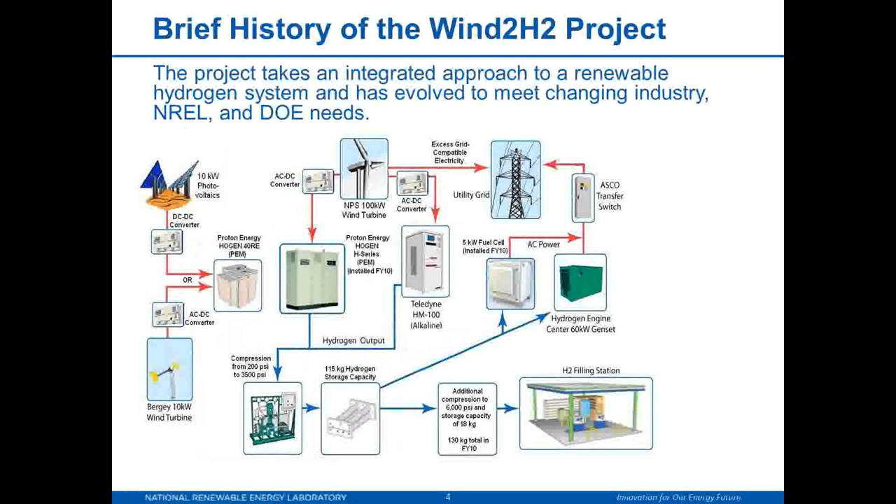So the physical part of the project looks like this. You can see we have the ability to tie in a variety of resources into hydrogen generation and production, both photovoltaics that we have on site and several dedicated wind turbines that we have on site. We can direct couple or through DC conversion couple those to a variety of electrolyzers. We can then compress and store the hydrogen. And you can see how the station here has evolved over the years. We've got different electrolyzers, different compression technologies.

We can then take the hydrogen that we produce, store it, and then use it to fuel vehicles or put it back on the grid using either a genset or a 5-kilowatt fuel cell. And one of the things we're working on seriously right now is improving compressor reliability, because we found through our data gathering activities through other DOE projects that hydrogen compressors are really a reliability concern when it comes to the hydrogen fueling stations.

So the question you might ask is, why would we do this analysis? And just again, in this analysis we looked at an hour-by-hour cost modeling of centralized wind-based electrolysis. So as Eric mentioned, cost is a problem. Wind electrolysis production cost estimates were limited geographically before we did this analysis, and we really expanded it to cover more of the country. System efficiency remains a barrier as well, and that primarily goes into the efficiencies of the electrolyzers.

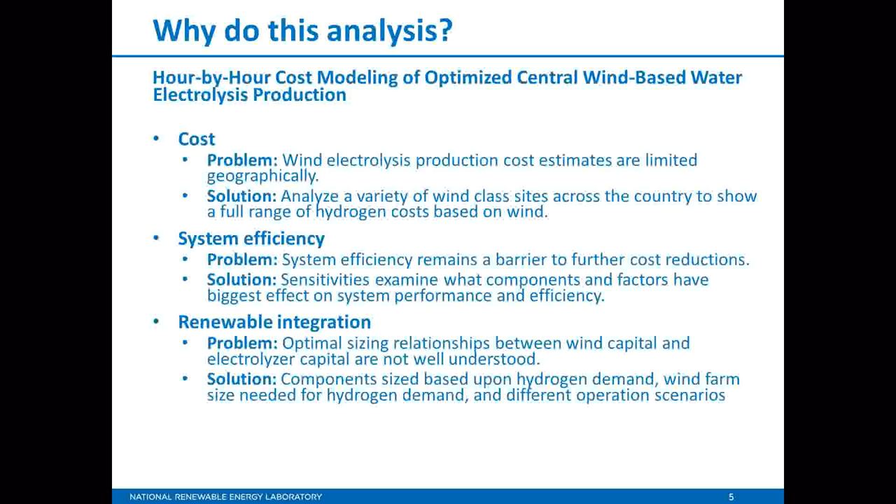So we did a sensitivity analysis to look at what components and what factors have the most impact on the cost of hydrogen produced in this method. And we also wanted to look at the relationships between the size of the wind and the size of the electrolyzer capital that you would be deploying in a case like this.

So we wanted to expand the previous analysis that we had done a few years ago, which just focused on California and the California electricity market, to look across the nation, look at the consequences of different configurations and different operation scenarios, understand the sizing implications between the electrolyzers and the wind farms throughout different parts of the country, and identify further analysis and cost reduction areas.

So at a glance, this analysis looked at 42 different sites in 11 different states spanning 5 electricity markets. And for those of you who know anything about the electricity grid in the United States, we often talk about it as this sort of monolithic thing, but it's not. It's a patchwork of different regional electrical grids and markets operating in each one of those.

So we looked at wind classes that range from class 3 to class 6. If you get below class 3, it definitely doesn't make any economic sense, so we didn't look at those. And the higher class wind sites are pretty rare and located in special geographic locations, so we didn't really look at those either.

We looked at size ranges from 1,000 to 50,000 kilograms per day. An independent panel analysis in 2009 among electrolyzer producers found that in that range, the costs of scaling up are fairly linear. You don't get huge economies of scale in that range. And we also updated the analysis to harmonize with current DOE targets, which use 2007 as a reference year.

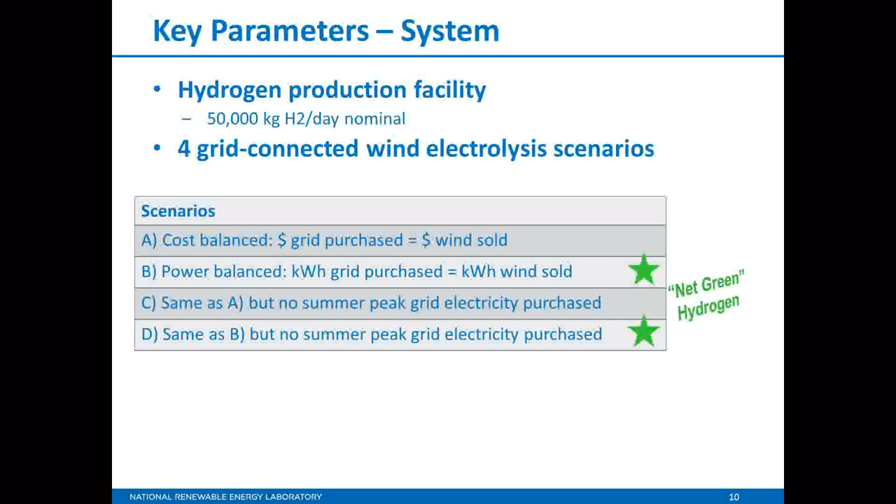Some of the parameters of our analysis. So we looked at a nominal design capacity of 50,000 kilograms a day with a 98% capacity factor on the electrolyzers, not on the wind. 106 megawatt hour electricity requirements at 50 kilowatt hours per kilogram, which is a fairly decent number for large scale, primarily alkaline electrolyzers of the size we're talking about.

53.2 million total depreciable capital costs. We included replacement and O&M costs, and we also included in the analysis of the life of the plant a 10% internal rate of return. So somebody doing this would actually be making some money at it, which is, of course, key to having success in any kind of new energy technology.

The wind farms, we looked at multiples of 3 megawatt turbines, which are generally the largest size that can be based on land these days. The general design performance was based on a Class 4 wind site, although, as I mentioned before, we did scale up from Class 3 to 6 wind sites.

We updated, based on a report from Wiser and Bolinger, some colleagues also here at NREL working in the wind program, the costs for the wind turbine capital and the O&M costs, the operation and maintenance costs. And you can see the wind capital costs went down slightly to $2,067 a kilowatt, whereas the O&M costs went up slightly. So we accounted for that.

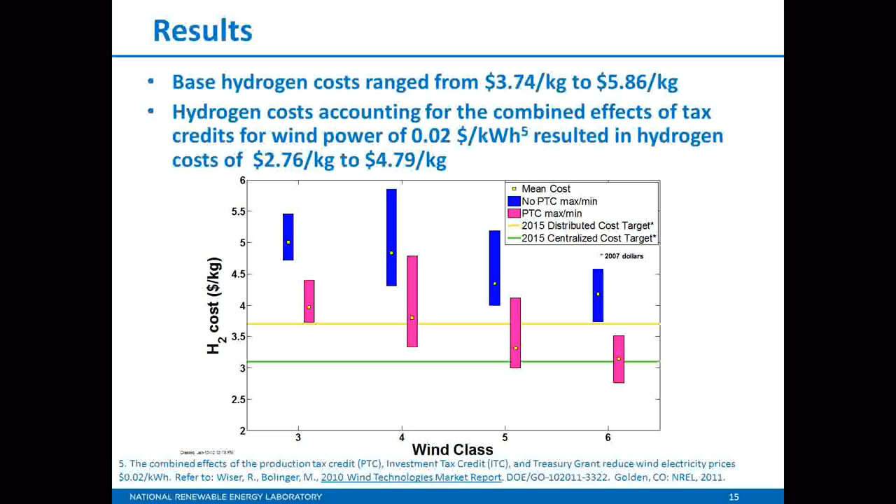Going on to the sensitivity analysis, we did look at the base case, which included wind turbine capital costs of $2,000 per kilowatt, electrolyzer energy use of 50 kilowatt hours per kilogram, capital cost at $408 per kilowatt, wind farm availability at 88%, and electrolyzer capacity factor at 98%. Again, we want to run the electrolyzers at their full power as much as we can to get the best capital utilization out of them.

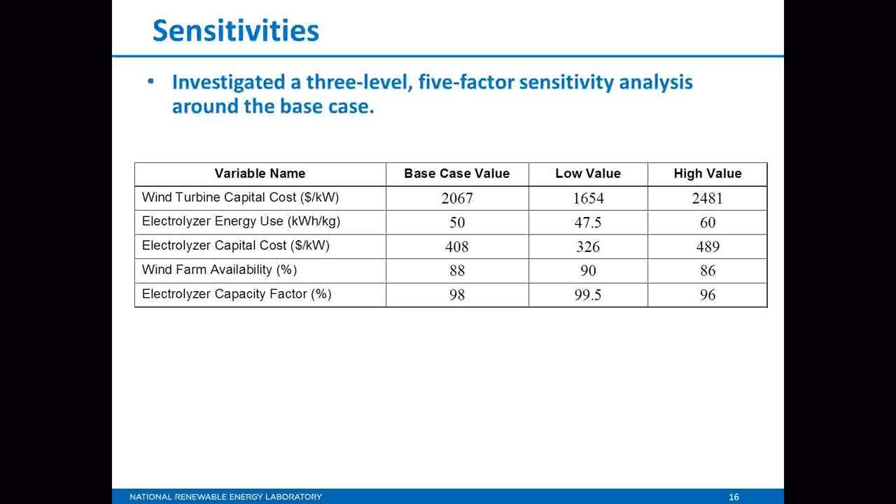So the more efficient we can make the electrolyzers, the lower cost hydrogen you're going to be able to produce. Because the primary feedstock you feed into an electrolyzer, for those of you who aren't familiar with the process, is electricity and water, and electricity being the most expensive of those feedstocks. So to the extent we can decrease that cost, you can produce lower cost hydrogen. Electrolyzer availability and wind availability, we didn't vary those sensitivities very much, but they didn't have very much of an impact either.

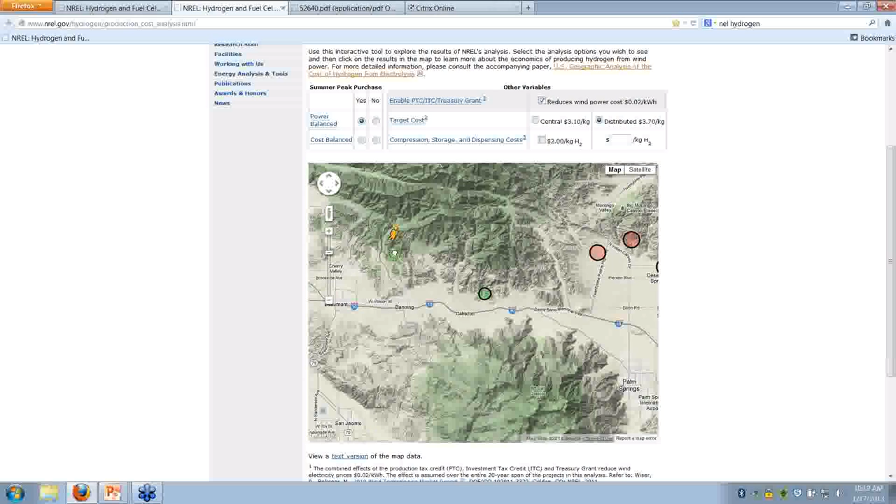But this really gives you more control and a better view into what the results are and how you can use them. And in fact, we found some surprising things, and you can zoom in. All of the goodness that comes along with Google's map program is available to you. So you can zoom in, of course, and you can turn on the terrain view, and you can turn on street view, and you can see exactly what the wind site that we're looking at looks like. So in this particular case, it's pretty empty, maybe a good place for a wind farm.

So let me go back to PowerPoint here, and so generally the way this website is set up, you can see red circles are sites that don't meet the DOE targets, depending on the assumptions that you've placed on the analysis here up at the top in the control panel. Green means it does meet the target. And furthermore, the size of the circle scales with the cost of hydrogen. So the smaller circles equals lower cost hydrogen, which is great, right?

So some of the controls you have available, as I mentioned, there were 4 scenarios that we used. There was power balanced, cost balanced, and there was the question of whether you purchase peak summer electricity or not, yes or no. So you can pick any one of the 4 analyses here, and it will update for you. You can also change the DOE cost target that you're looking at, either the central target or the distributed target, and that will change the color coding on the circles accordingly.

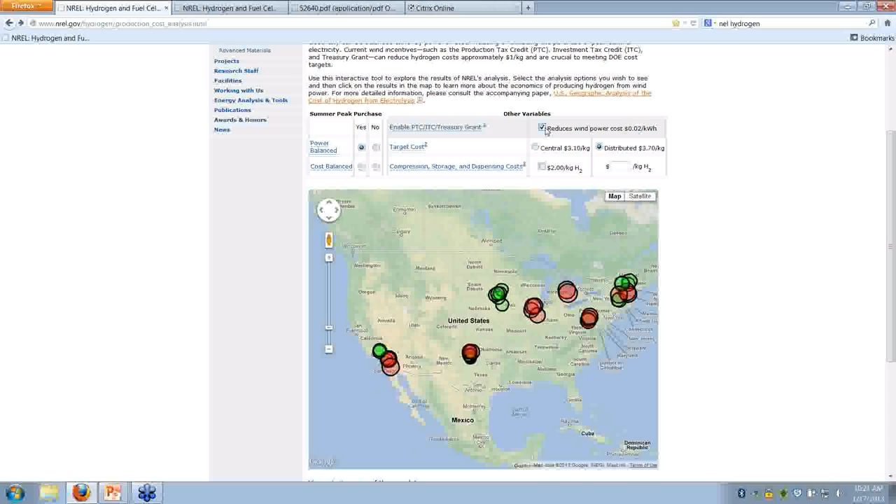You can also turn on and off the PTC, ITC Treasury grants. And as you can see on the map, we can even go do that right now. We have the PTC turned on right now, and we're comparing to the distributed target. If you turn the PTC off, all of your green circles go away. So again, that shows the importance of having those incentives in place for a production like this.

So the other thing, as I mentioned in the scope for this analysis, we didn't include compression, dispensing, and storage costs because we really wanted to look at hydrogen production and focus on that. And CSD, these costs are typically things that people talk about when they talk about using hydrogen as a vehicle fuel, which right now is a very, very small market for hydrogen use in the country. Things like petrochemical industry, pharmaceuticals, metal refining, things like that are much, much larger uses of hydrogen. So we did allow people to put in CSD costs they may have done for their own analysis. The $2 per kilogram here comes from an independent study, again, that was done in 2009, looking at what CSD costs could be.

So you can either click the $2 per kilogram and add in the sort of the default, or if you have another number you want to put in, you can put that in as well. And it'll show you the results immediately, so you can see what the effects would be. And we really did this just because it gives the users, the potential audience here, much more power and much more ability to control and explore these results and ask questions of them and then get their own answers immediately. I mean, of course, we're always available for questions, but if you can get the answers yourself right away, then most people prefer that.

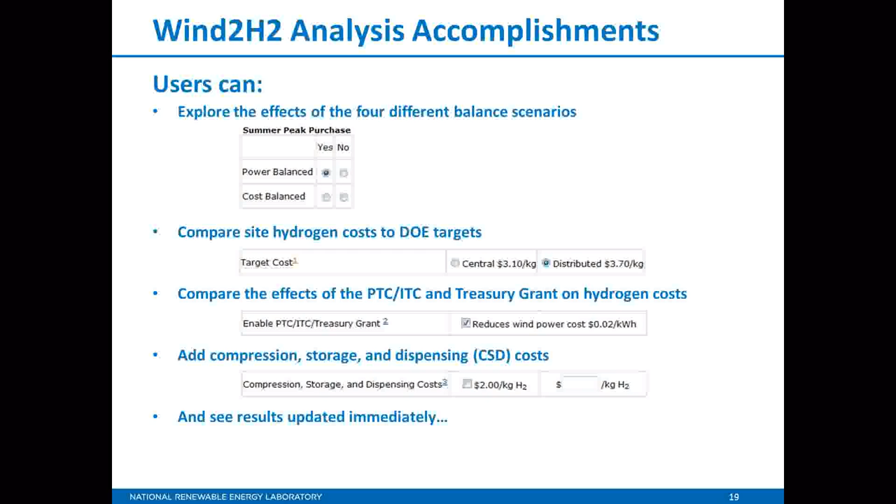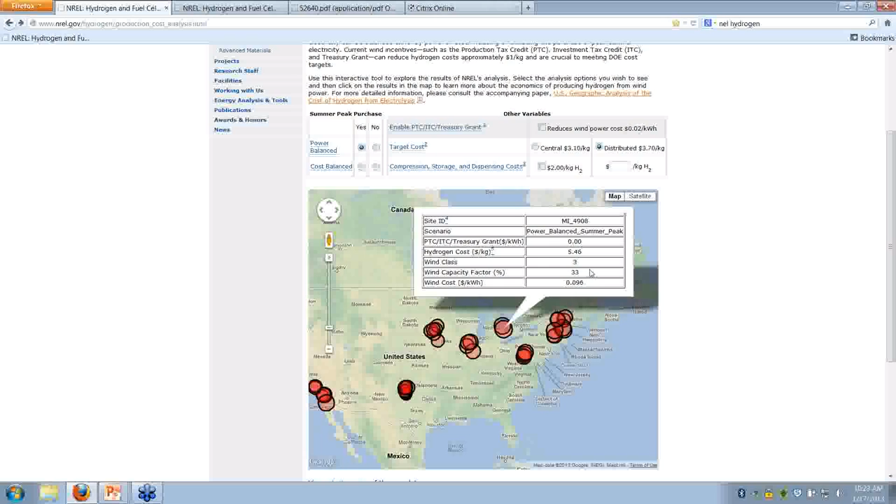So some things that we saw that were interesting. I will say when you mouse over a site, you will get a pop-up that shows you some of the metadata about the site. So you'll see the site ID, and these site IDs go along with the eastern or western wind data sets. So you can look at the source wind resource data that goes along with it. Which scenario was used? In this case, it was power balanced, and we are purchasing summer peak electricity. Whether the Treasury grant is on, what the hydrogen cost was, the wind class, the wind capacity factor, and the wind cost in dollars per kilowatt hour. So you can see that for any site that you mouse over. Again, giving you a lot more control and insight into it without having to read a dry technical paper.

So some things we found that were surprising that we didn't really expect, but when you add all the extra information that comes along with the Google Maps API, you really start to see some things that wouldn't necessarily jump out at you before. So this is a case that I zoomed into earlier in Southern California. You can see the mountains here are really shading these 3 potential sites.

And although these are all in the same electricity market, they're nearly the same wind class. The hydrogen cost here in the mountains, behind the mountains, is about $4.50 a kilogram, whereas here we're $3 a kilogram. You sort of have this wind tunnel effect, basically, that's going to give you a much better wind resource and make the difference between meeting a DOE cost target and not. So some of the interesting

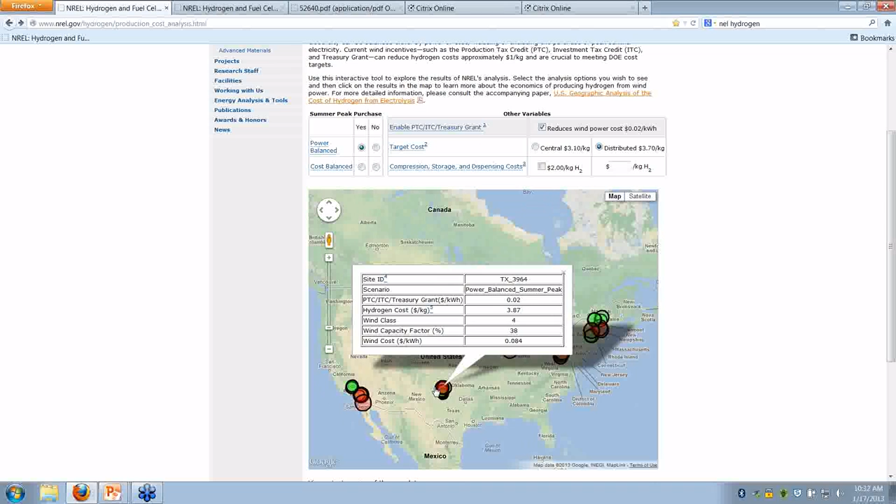So if you turn that on again, you do see about $1 per kilogram at most sites reduction in the cost of hydrogen just by turning that on. So again, here in Southern California, having the power of being able to look at this stuff geospatially and see all the extra data that comes along essentially for free with the Google Maps API, you can really see some details that wouldn't reveal themselves otherwise.

So again, in this case, we've got 4 sites. They're all in the same electricity market. They're all very close to each other geographically. But these sites back here are shaded by the adjacent mountains and may not make sense. So these sites are producing hydrogen at about $4.50 a kilogram, whereas this one here in the valley is producing it at about $3 a kilogram.

So again, as any wind developer will tell you, geography matters. You need to understand your wind resource very well. Things that can disrupt your wind resource are going to be important.

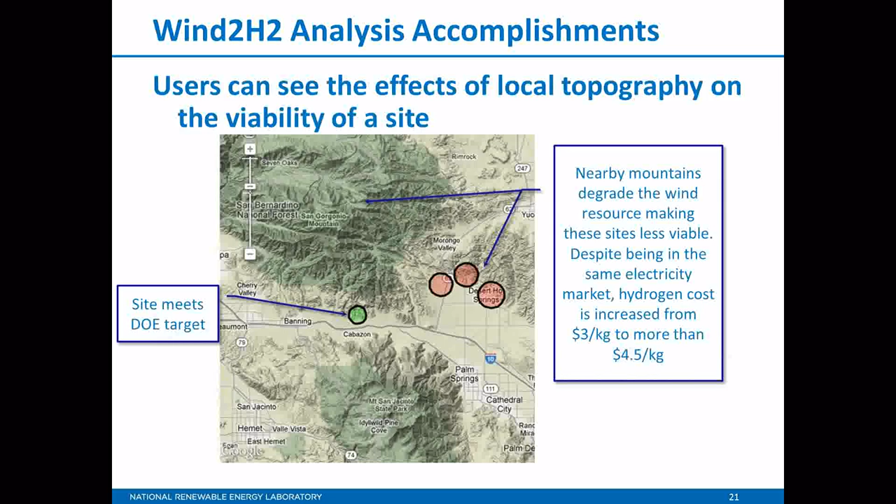Again, in summary, with the PTC, ITC, and Treasury grant, you do see about $1 per kilogram improvement in the cost of hydrogen. And even though the Treasury grant is expired, that really only went to 12 wind projects across the country anyway. So having the Treasury grant be gone shouldn't have much of an impact on the result here. And as I said, the PTC was renewed by Congress for another year, and the ITC is still intact.

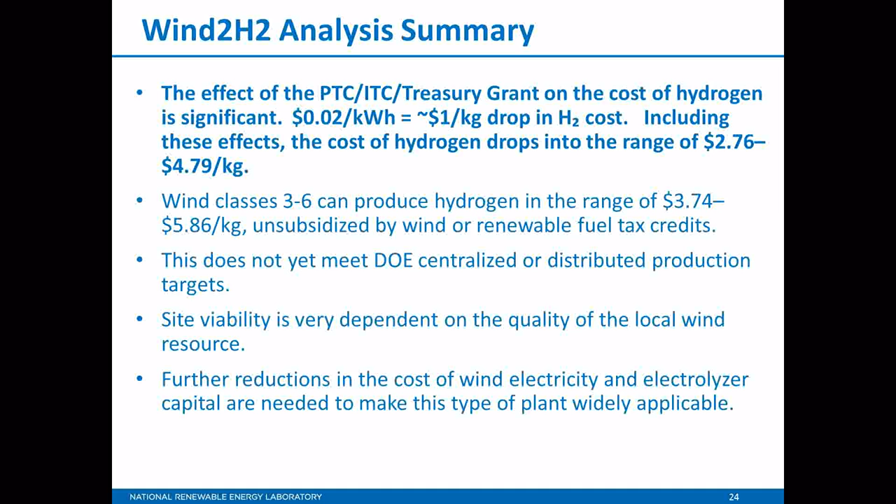Looking at wind classes 3 through 6, you can produce hydrogen from $3.74 a kilogram to $5.86 a kilogram, unsubsidized. That still doesn't meet the DOE centralized production or distributed production targets, but as we saw in the sensitivity analysis, the biggest effect there is the wind capital cost, and then the second is the electrolyzer efficiency. So to the extent that those relative industries are making progress in those things, the cost of doing a plant like this will come down.

So a 106 megawatt electrical requirement is what we're looking at, for the design capacity of 51,000 kilograms a day. For electrolyzer efficiency in the base case, we looked at 50 kilowatt hours per kilogram, and in the sensitivity analysis we pushed that up and down. 50 kilowatt hours per kilogram, including balance of plant, drying, things like that, is a pretty good number. From smaller, high purity units you can get more efficiency, and generally more with PEM than alkaline, but alkaline systems scale much larger. Right, Chris, that leads to another question.

Maybe do you have off the top of your head the conversion to a percentage efficiency? So on a lower heating value basis, 33.3 kilowatt hours per kilogram is the best you can do. I think that number's right. Yeah, that sounds about right. That's equivalent of 120 megajoules per kilogram, that's the energy content of hydrogen. So if you were to have a thermodynamically 100% efficient unit, you would be producing at about 33 kilowatt hours per kilogram. Great.

Another question. Are the sites on the Google map existing or proposed sites, wind sites? It's a mix. Some are existing, as you saw in the street view. Some may be proposed, and some are just sites where we have data on the wind resource. Okay.

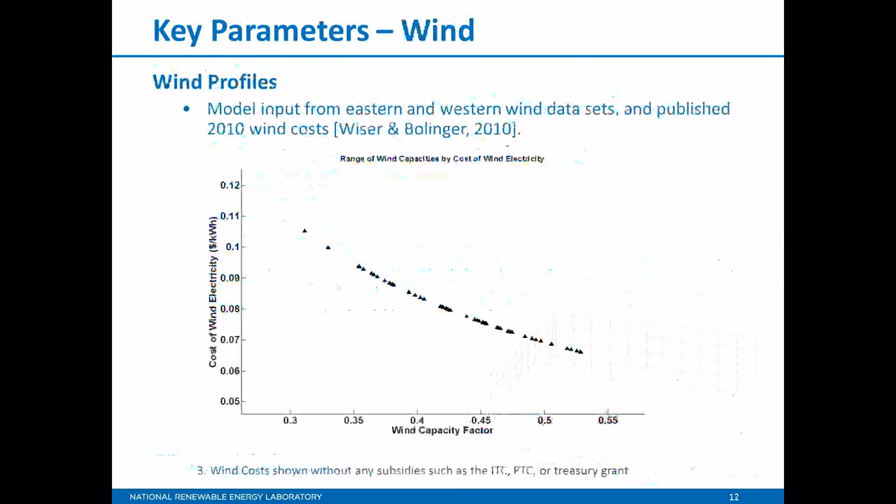Let's keep moving. Can you comment on wind versus solar for hydrogen production analysis? So this analysis didn't look at solar. Through the experimental arm of this project, we have done work to reduce the cost of producing hydrogen from sun, basically by direct coupling. So if we go back to the overall system layout, back. All right.

On the question of larger scale hydrogen production from sun, it's really going to boil down to what your dollars per kilowatt hour is. How cheaply can you produce the electricity? And in general, where we're at right now, wind can scale to huge sizes more cost effectively than solar PV can right now. Did that cover the question?

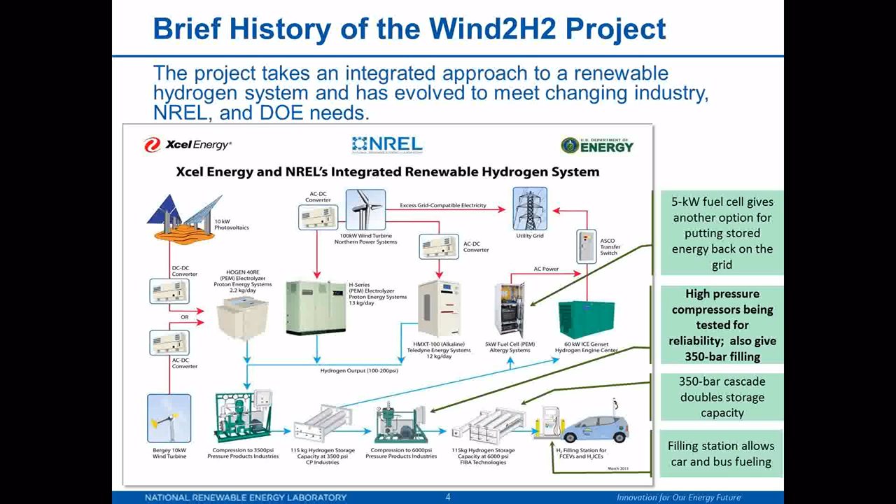Okay, thanks. I think we still have a few more minutes and we have some more questions. Could you address this topic? What plans, if any, are there for hydrogen fuel production from wind power to supply the expansion to 68 hydrogen car refueling stations in California by 2015? That's a good question. I don't know that wind is a central part of any of those.

So another one of the activities we do at NREL here, that's also sponsored by DOE, is to collect data on the infrastructure that's being put into California. And those stations that are either working or being proposed or built rely on a variety of technologies. There's one station that uses digester gas. There are some that use delivered liquids. Some use electrolysis. There's one in Torrance that uses a pipeline that actually runs near the station.

So the stations really use a variety of technologies, and it all boils down to what makes sense at that station, at that location. So I'm not aware of any plans to incorporate wind into any of them at this point. Right. Well, it's interesting. You do show a number of points in the Southern California area where this would make sense. So there certainly are options to integrate wind to hydrogen as a part of the overall portfolio.

Right. And again, this analysis looked at big centralized plants, which you're not going to put in a retail location. Although, as I said, you could with a single wind turbine, if you can get past the not in my backyard issues. If you can get that wind turbine close to your hydrogen station, it can produce enough hydrogen to really satisfy the near-term need for vehicles.

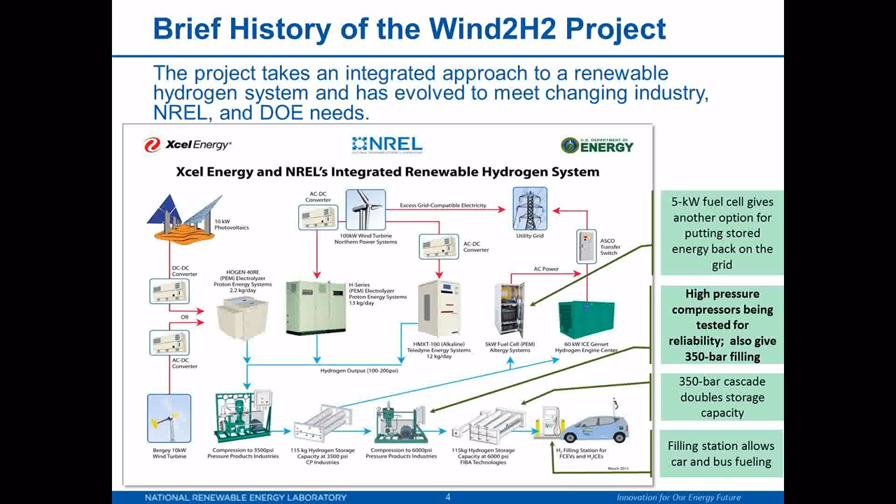Right. Well, questions are actually still coming in, so we'll just keep going. Oh, okay, Genevieve, I'm sorry to interrupt. Continue. I was just going to add, I think in the paper there's also a chart that looks at the percentage of wind that's going into the electrolysis versus onto the grid for all the sites. Okay. Very good.

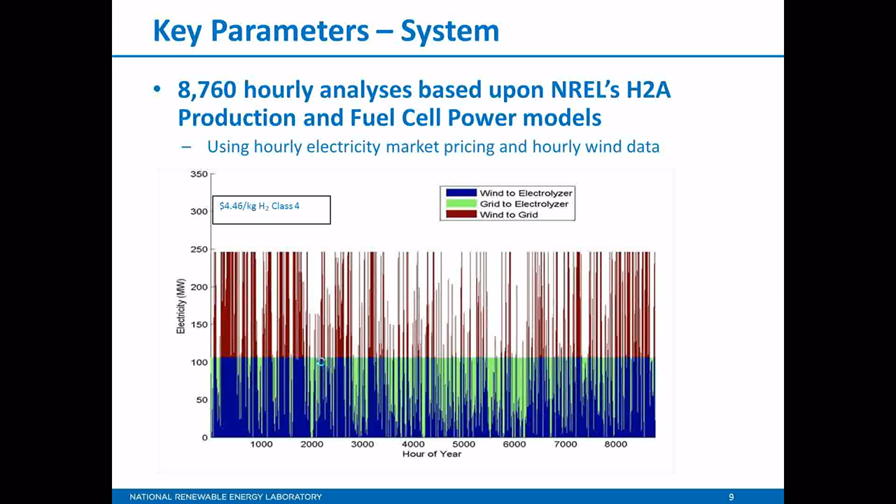Have you done any volume of water consumption analysis as a part of this? We didn't look at that specifically. I don't have a slide here to talk about it, but the water volume consumed is a very linear function of the amount of hydrogen you're producing, because it's all conservation of moles, right? All conservation of mass. So of course, water is a feedstock you have to have. So if you are in a place that doesn't have water, or water is very expensive, then that's going to add to your costs.

But generally, water. If you were to take a bucket and fill it with water, and take the same size bucket and fill it with liquid hydrogen, the bucket with water in it would actually have more hydrogen in it than the bucket with liquid hydrogen. So water is a very, very good carrier of hydrogen. Okay, and you're right. We can back out those numbers, and I'm sure that the water and the water costs are integrated into cost analysis in general. Right.

We didn't look at that in particular, although the question is absolutely correct that, to the extent that you can locate a site like this near an existing hydrogen pipeline, you're going to drastically reduce your costs, because your compression, storage, and dispensing costs are essentially none, or very little, right? So that is something we could consider for future analysis if we carry on with this. So it absolutely makes sense. To the extent you can get the generation close to the point of consumption for anything really, but definitely for hydrogen, you're going to reduce your cost.

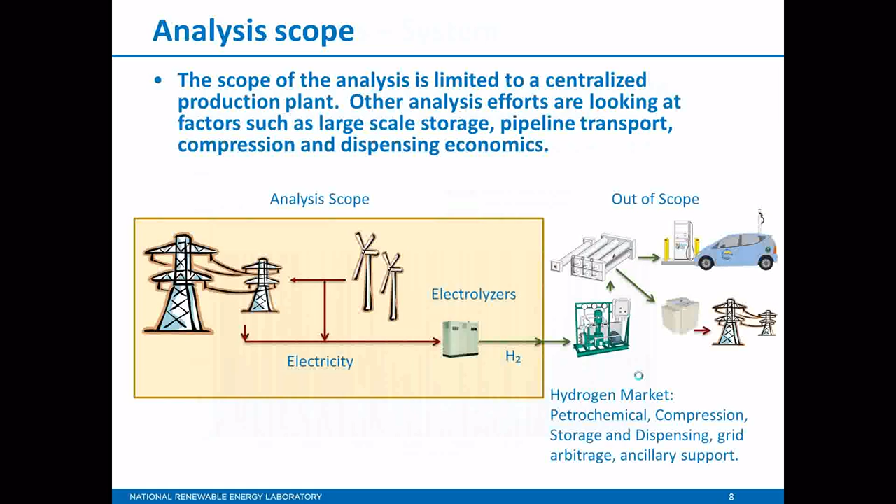Have you done analysis of energy storage, using hydrogen as energy storage versus pumped hydro, for example? What the overall cost or effectiveness would be, efficiency of using this as an energy storage mechanism, using hydrogen versus pumped hydro from the electricity from the wind? So NREL has done those studies. Those were not part of this study.

And jump in if I'm wrong, Genevieve, but I think Marc Melaina had done something like that recently, or possibly Darlene Steward. So those studies are out there, and we have done them, but they weren't part of this. Okay, so there's a separate NREL study that will address that question explicitly. Yeah, and I think that beyond looking at pumped hydro, they also looked at compressed air energy storage, sodium sulfur batteries, other big ideas for storing grid power and doing wind arbitrage.

I will say that the round-trip efficiency of doing hydrogen storage en masse like this is not really good, but the fact that you can use the hydrogen for many other things, you can produce a valuable feedstock that you can sell in a variety of different markets, is one thing that sets that sort of solution apart from a battery solution or pumped hydro or CAES or anything like that. So there are a lot of co-products you could get out of a situation like that where you're producing hydrogen for arbitrage.